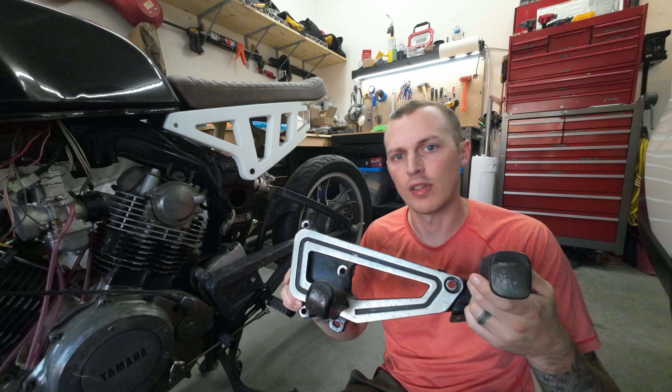I'm Derek, and in this video I'm going to show you how I created this forged carbon fiber foot peg bracket to replace this ugly cast aluminum stock piece. I hope you like this video. Stay tuned to the end to see me put it on and do some tests with it.

With the unit right from the bike, the first thing that I wanted to do was replace the foot pegs. These are really big and clunky, and actually on the other side they were ripped off and just ugly. I needed to replace them anyway.

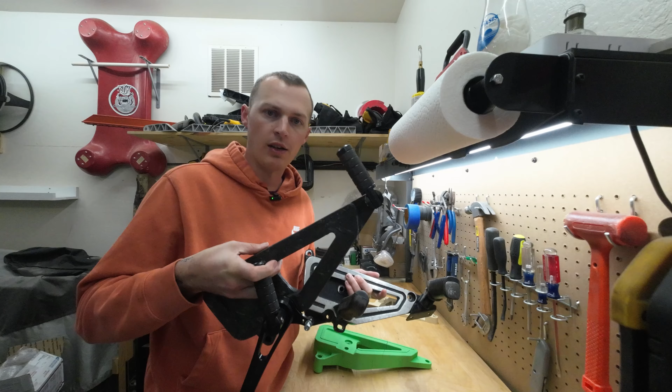So I found the Cognito Moto foot peg brackets that are folding, which I have on the new piece here, that I really like. So when I got those, I did mount them on here, and I thought that it just didn't look right. They were too modern for the look of this old piece.

Granted, I could have sanded this down, cleaned it up, and painted it or powder coated it to make it look a lot more modern, but it still just didn't match the bike.

And when I decided to do forged carbon fiber for the subframe, I thought, well, what would make it look really nice is if I did the foot peg bracket out of forged carbon fiber as well.

Originally, I was thinking of making it billet aluminum, same with the subframe, but the issue just comes down to cost and complexity. So to start off with, I had to reverse engineer the stock piece, and there's so many ways to do this, and a lot of people have different techniques for how they do this.

In this case, what worked best for me was to take the flat face of this foot peg bracket, lay it down on a large sheet of paper, trace it with a pencil, go into the holes and mark where the holes are in relation.

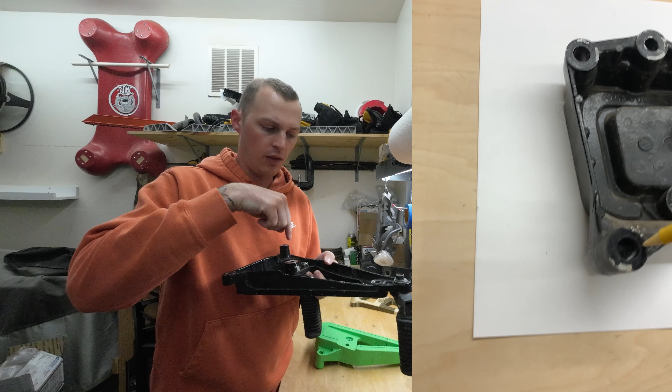And then take that sheet of paper, put a ruler on it, and put it in a scanner and scan it.

And then once it was scanned, I was able to open that up into SolidWorks, which is my preferred CAD package. And then I can scale the image based on the ruler that I put in the image, and from that, I can design the part around.

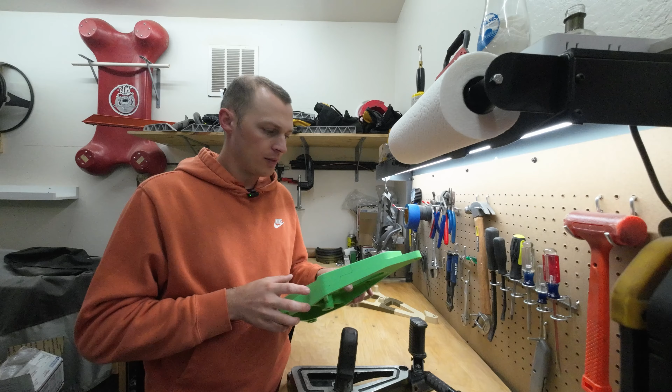So what I did is I would 3D print small little pieces that would make sure that I could get the whole pattern correct. Once I got the whole pattern correct, I replicated the part in 3D print.

I did a few things a little bit differently on the back side. This is just a cast part. You can see it does have some supporting ribs and looks a little bit different.

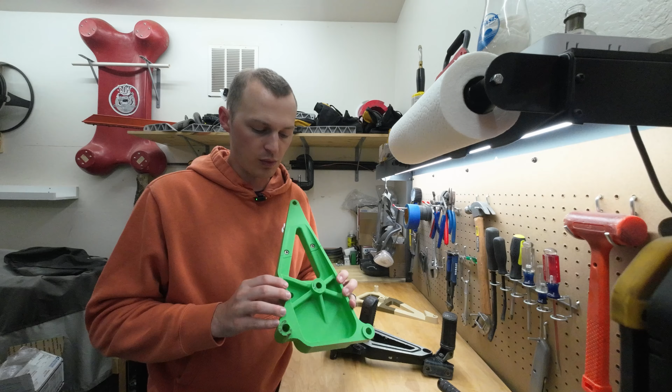To make it a little bit easier for me to do the forged carbon fiber, I made it a lot more simplified on the inside, but I kept some very strong ribs for where I knew the parts were going to mount. So from there, it just came down to making the mold.

So what I'll do is I'll take you through designing the mold, the actual cleanup process, the 3D prints, forging the parts, and then we'll touch base at the very end and we'll get it on the bike, and I'll talk you through some of the other things.

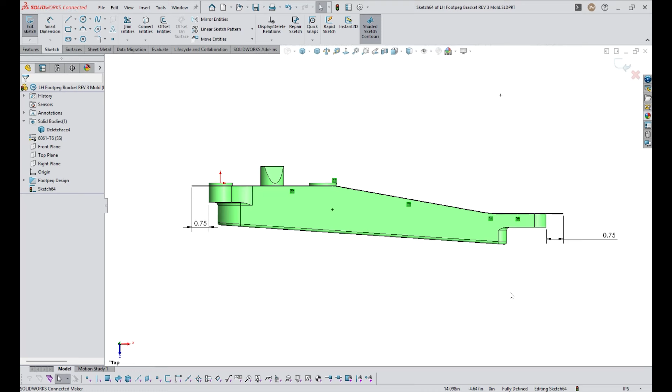Creating the mold for any sort of part for forged carbon fiber is really complex, but when you get a part that's actually quite large like this, it becomes even more complex due to some limitations, especially on my side with my 3D printer.

So I can't actually print this whole piece as one because it's too large, so I do need to split it up.

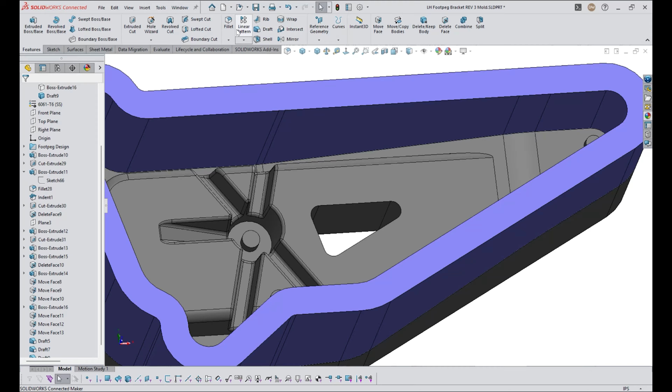But just in general, creating a mold is actually quite difficult for a number of reasons, right? You have to identify the direction that you're going to be pulling the part out. You need to make sure that you have available draft in the part so that when you do go to split it up, it can actually be pulled apart.

You have to take liberties for how you're going to actually get the components off. And in some cases, you even want to add in some ejector pins.

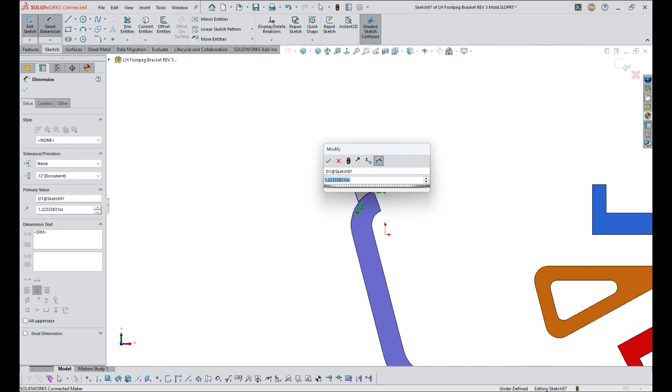In this design, I added in a lot of these flanges around the outside of the part, which actually helped it really easily split from the mold. So you want to make sure that you chamfer all of those edges and allow yourself a way to drive like a wedge in there so that you can split those up.

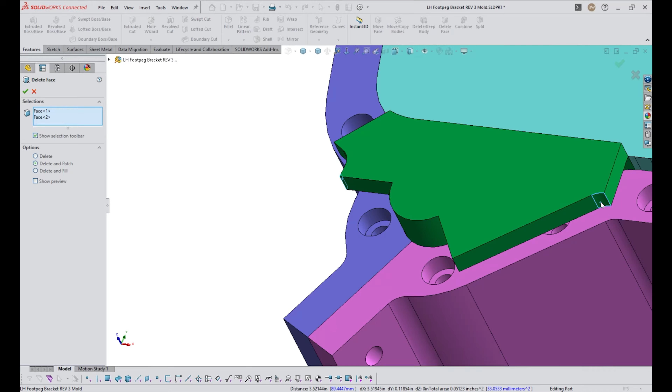In my previous design, I did it a little bit differently, and I actually found that creating these flanges on the outside was the easiest way to do it. But what you'll notice is in these sections here, these green pieces, there were some parts of the actual foot peg that sat a little bit lower than the top side.

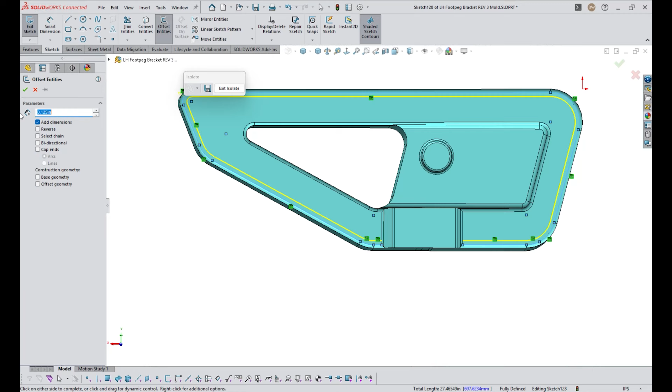So these needed to essentially be inserted before the piston starts going in. You have to take note of how much material gets put in every place. You kind of want a uniform thickness all the way throughout, and you want that top surface the piston hits to be flat, so that when you're pressing and packing it in, it's all packing consistently.

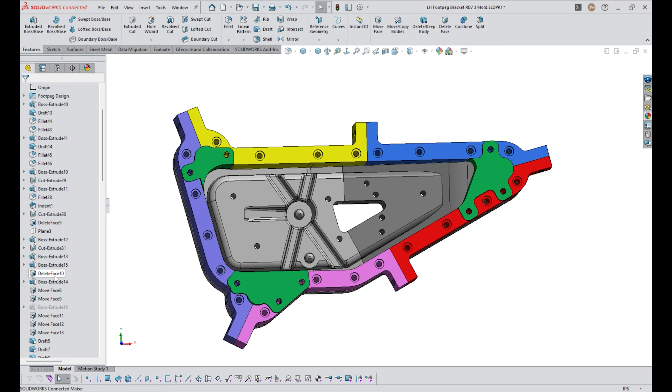But in my case, I had some parts of the actual foot peg that lived a little bit below where that top surface is. So those green pieces actually went in beforehand, before the piston went in, to drive it home, but also to hold those down in that location. When we actually go to do the forging, you'll see what I mean.

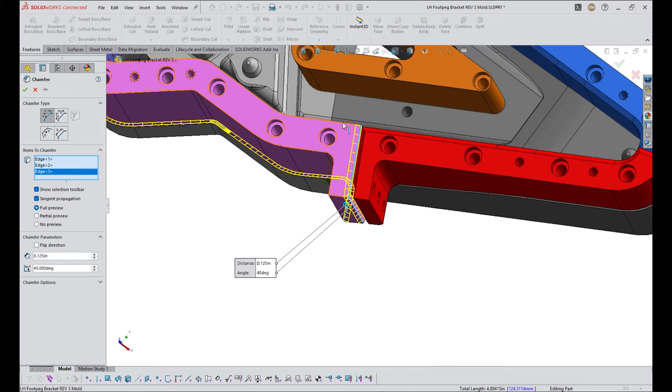But the biggest challenge here is essentially just making sure that everything can pull apart. You've got radiuses where you need them, you've got chamfers where they need to be, so putting in all the chamfers now, and then just making parts that actually bolt together.

I like to download fasteners from McMaster-Carr, the ones that I have purchased or the ones that I'm going to purchase, and make sure they fit within the model and have the correct amount of engagement in the nuts. But the one thing I learned while doing this is having all of these bolts accessible from the top side is really great when it comes to putting it together and taking it apart.

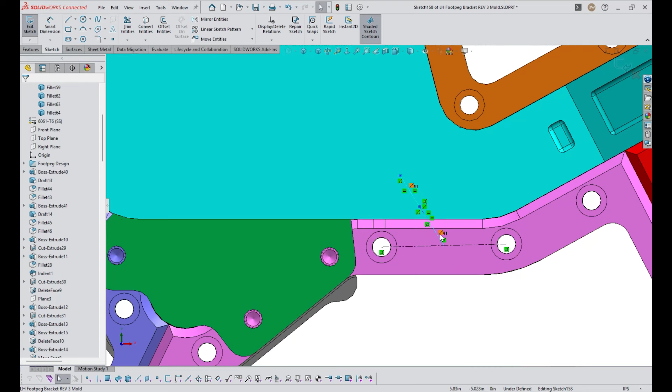But they also got filled with epoxy, and it actually made it quite a bit more complex. What you'll see is I am creating a BOM for all of my fasteners so I can go buy them.

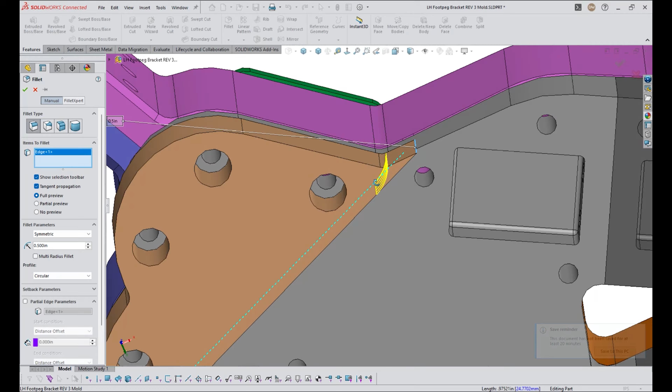In this case, right now, I'm creating essentially a base that holds it at an angle. Because this part is angled on the top side, I needed to fill up one section of it a little bit higher than the other. So I made these pieces to kind of make it level so that I knew the top side could be level.

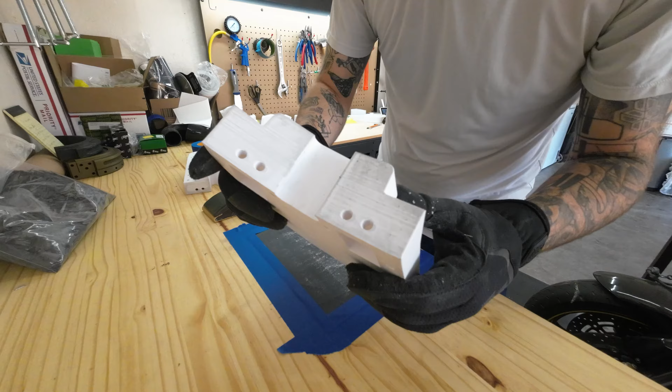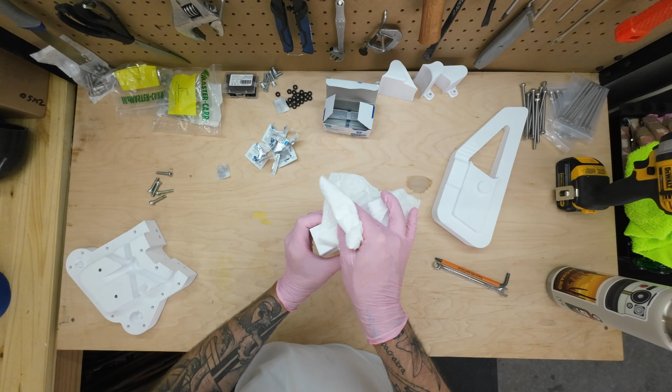Once everything was printed out of PETG, I actually used, I want to say, 5 or 6 wall loops and only 20% infill. I know other places recommend you should use like 75% infill, but I didn't necessarily go that route. 20 seemed to work fine for me. I didn't ever have any blowouts during the molding process.

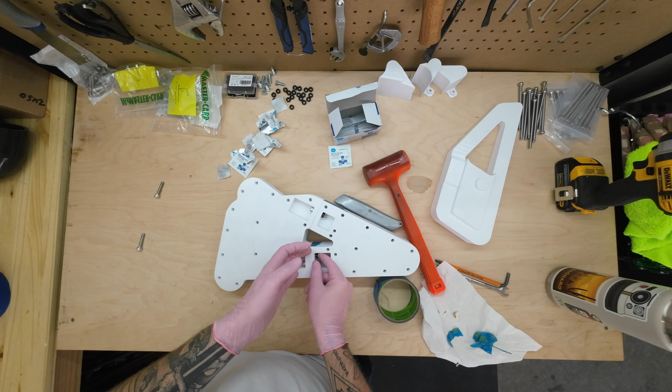But during the printing, the faces aren't necessarily perfectly flat, so you need to sand them so that you create an airtight barrier. I did, in this case, put some tape in between them, thinking it might be a good way to seal up any sort of cracks. I tried to do it everywhere, but the tape wasn't thick enough, and it ended up creating an absolute mess.

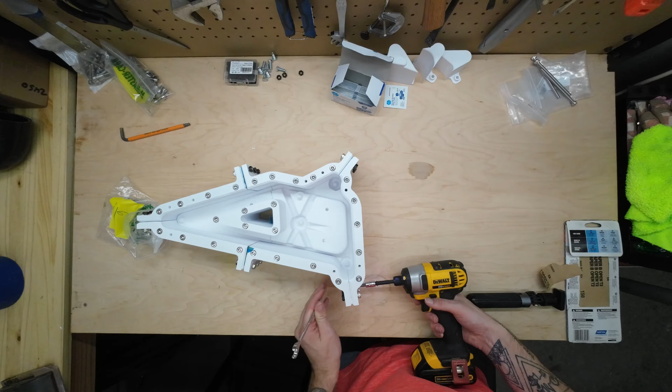But, you know, test fitting the part and making sure that you can get the piston in before you do anything is really key. So making sure all your bolts go together and everything fits appropriately is really key before you start doing anything.

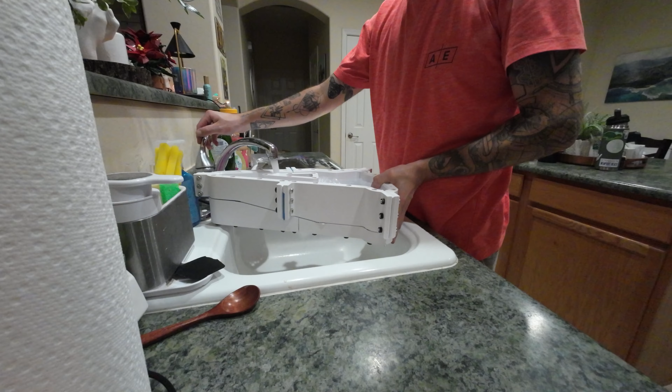And then ultimately, before you do any sort of forging, you want to make sure that it is watertight. If it's not watertight, epoxy is just going to leak out of it, and then you're basically going to ruin everything that you're planning on. In this case, you'll notice that everything was not airtight, and I've got water leaking out.

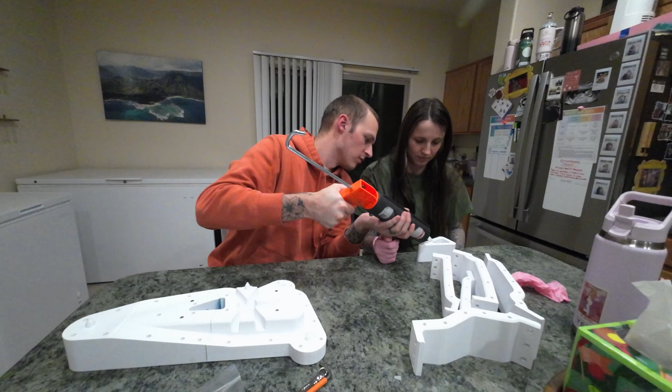So if you can't get it watertight, one way to fix that is some silicone. My wife and I sat down and put some silicone everywhere the parts would meet, and we basically siliconed the entire mold together.

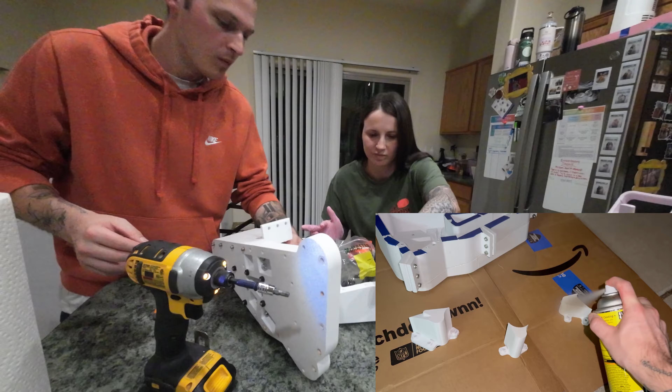Ideally, you want to spray release wax on all these parts before you put them together, but in this case, because we're putting silicone on it, you need to assemble it all with the silicone before you can do the release wax.

It does make it a little bit difficult when you're spraying the release wax on there before the molding process, just because it's harder to get into those nooks and crannies, but with the silicone in place, you definitely know you're going to get a nice watertight seal everywhere.

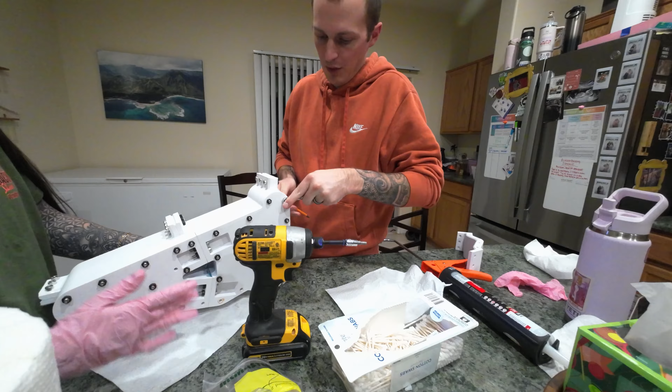So I used just clear silicone. You can find it anywhere. It had some pretty quick cure times.

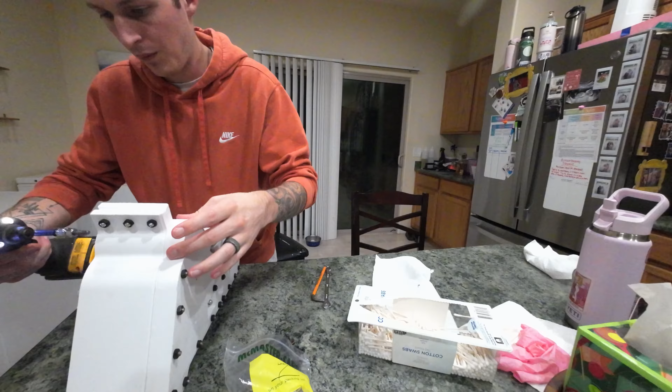Once everything was bolted together, you need to make sure that you go in there and clean up as best as possible. It's really hard to get down into that mold because some of those areas are pretty tight, so we used Q-tips and screwdrivers and whatnot to get in there and clean out those areas as much as possible. I also used some IPA wipes to clean everything up.

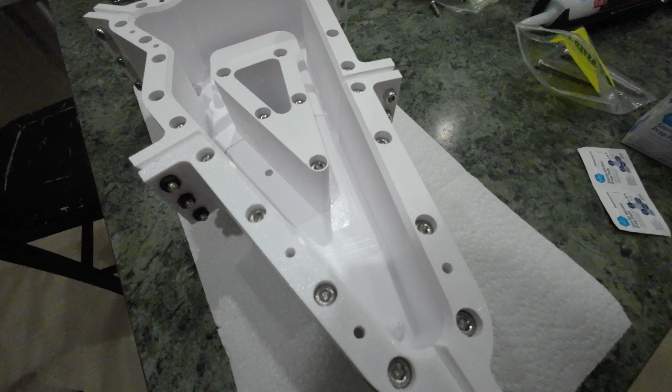So the inside looks really good from all the silicone. The outside definitely has some spill out, but I'm not too worried about that. I just want to make sure that it is nice and watertight.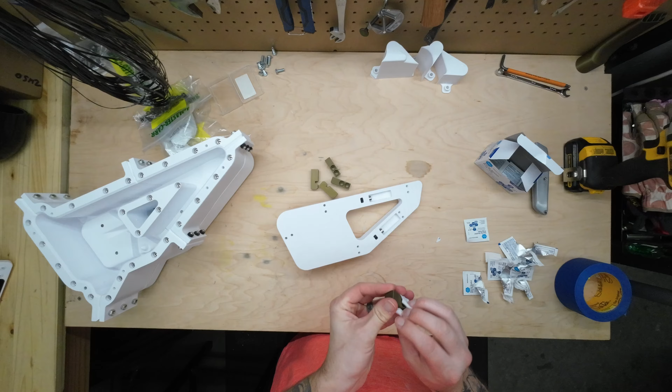So now I'm going through cleaning up. You'll notice these little blocks I put on in a past project I did. I made the top surface much higher, with a flange all the way over, so that when you press it in, you know when to stop.

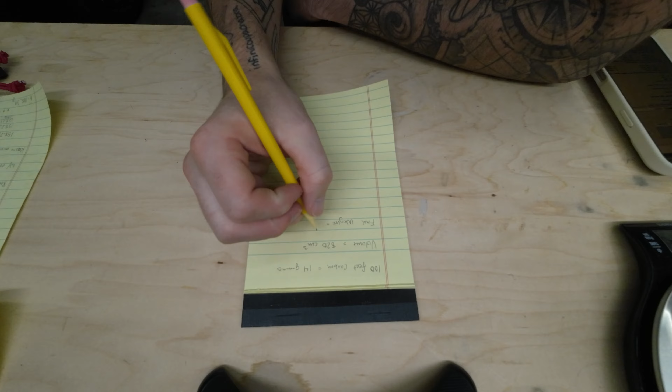But that wastes a ton of material because you essentially have to add material to that entire top side. So these little blocks allow me to know when to stop the compression without spending so much time or so much material.

So to make forged carbon fiber strong, you need long strands of it. You don't have to, but it does increase the strength. In this case, I've got a bunch of 100-foot sections that I was using to wrap up so that I can have long strands put in.

So in this project, I did 600 feet of continuous fibers or continuous strands, but they're broken up into 100-foot sections. You can kind of see them laying there, and then we will put them in.

Doing all the math to figure out exactly how many you need versus your weight, there's a little bit of math involved. You can see my previous video to see exactly what math you need to do, or check out one of the Easy Composites videos.

Packing the mold is the most challenging part. You can see we're starting to pack in some of the large continuous fibers, but essentially you want to make sure that you wet down the mold and then just start packing and wetting as you go.

It doesn't hurt to have extra epoxy, because any extra epoxy will essentially get pushed out during the forging process. When you start pushing that piston in, you'll just get all the resin come out. You just want to make sure that you are wetting down everything really well. If it's not wetted, it's obviously not going to glue itself together.

So this is the most tedious and time-consuming process. You can see I'm starting to put in some of those little corner sections. Once you've packed it in enough, you can put those in, drive them in, and then continue around.

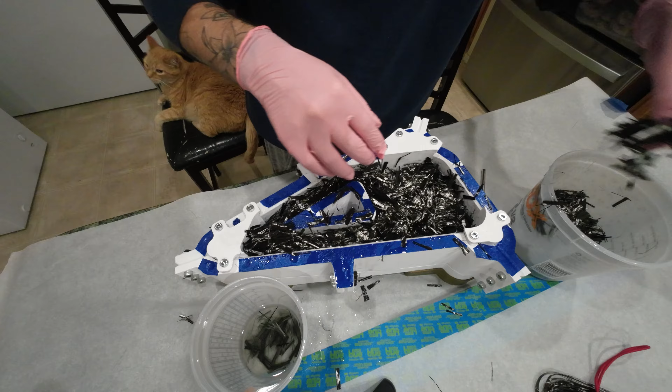It is really messy, so you'll need to make sure that you set up the area well. We like to use parchment paper because the epoxy doesn't go through it. If you just set up cardboard or paper towels, the epoxy can seep through and get on anything below. So just make sure that you have a nice clean area.

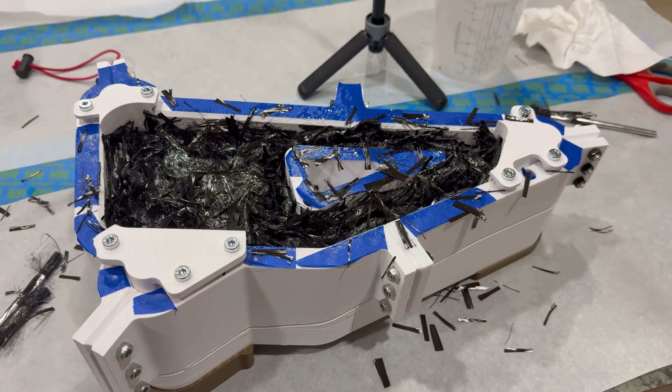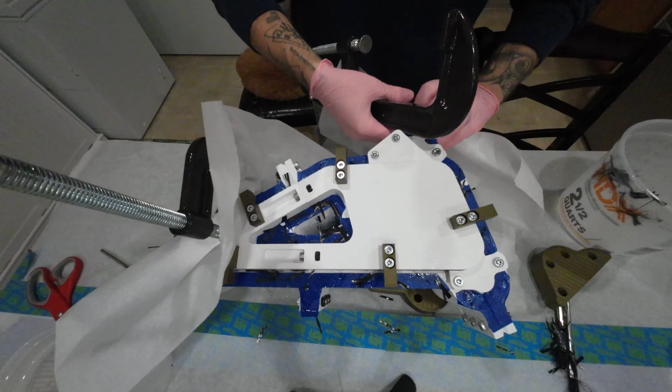You want to make sure that in your mold design you provide yourself enough room above so that you can start driving that piston home. In this case, I didn't make it quite tall enough, so it was a little difficult, but once you start getting the clamps on there, you'll start pushing them down. In hindsight, I wish I had a few more clamps, but four was good enough here.

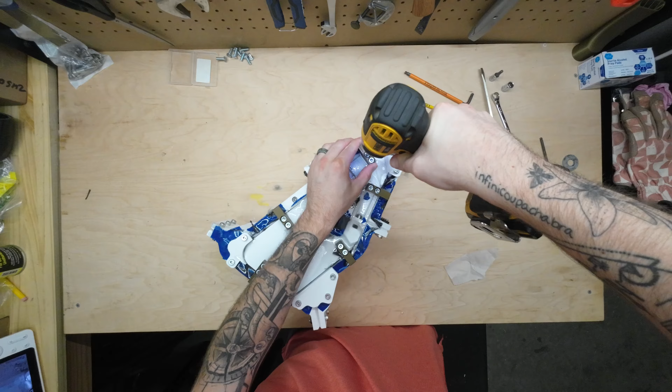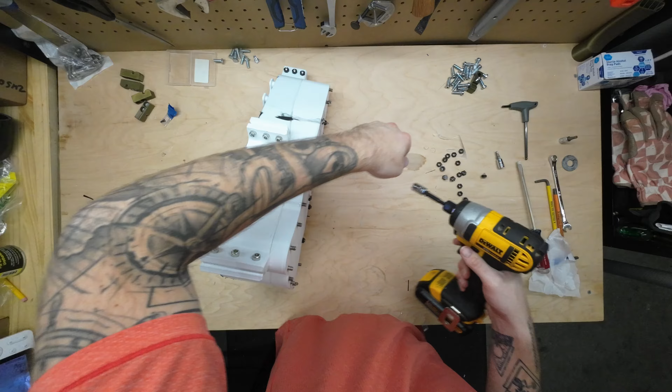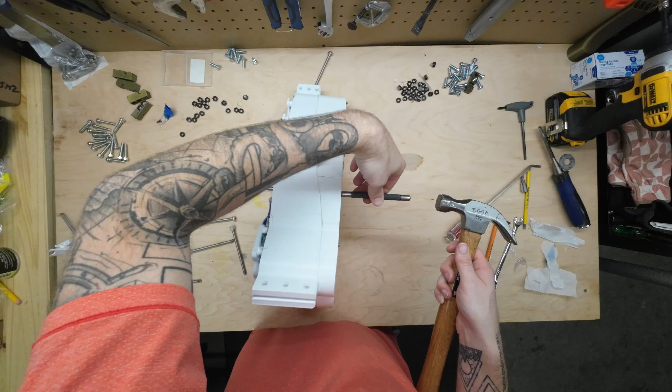One thing that ended up happening is on the bigger side of the mold, we put too much epoxy in, so I couldn't fully seat that side, and it actually has more material than I planned. But ultimately it doesn't seem to be an issue. It's something to note going forward, that I need to be very even when applying the resin and epoxy. I thought that side would need extra during compression, but it didn't.

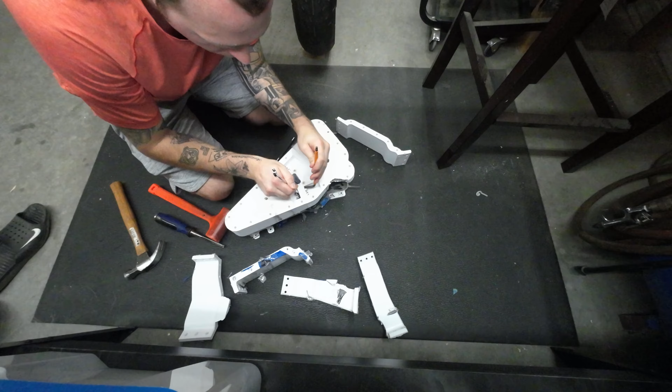You can see based on those flanges I had, it was actually pretty easy to remove those side pieces. The ejector pins I designed in were quite difficult to get out, and ultimately I ended up taking this into work and using an arbor press on those ejector pins to get them out.

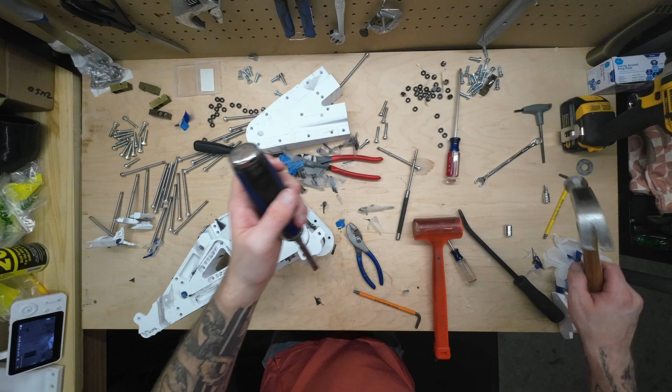When you push all that epoxy in, a bunch of the resin comes out, and essentially you create a vacuum in there. So the parts aren't just in there because they're a nice tight fit, they're literally vacuumed to one another. Some other things I did was drill some holes through the mounting locations I knew I needed, and that actually helped get it out.

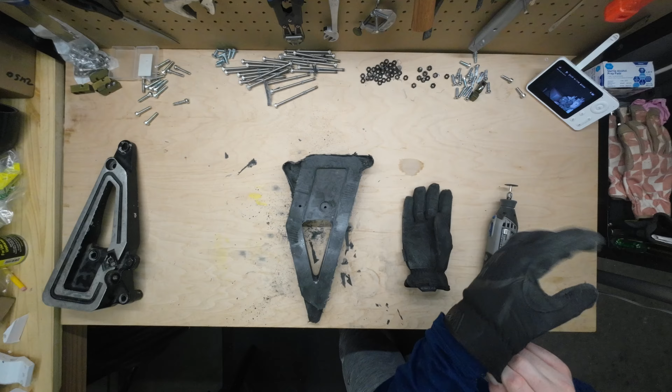But once you pull the part out, there's a ton of flashing on it, so you'll need to clean that up. If you do any sanding, make sure you're wearing a respirator — you don't want to be breathing in any of that carbon dust, it's not good for you. I like this full face mask because it covers your eyes as well. The fine particulate dust this creates is pretty crazy, so you don't want to breathe it in, and definitely don't want it in your eyes.

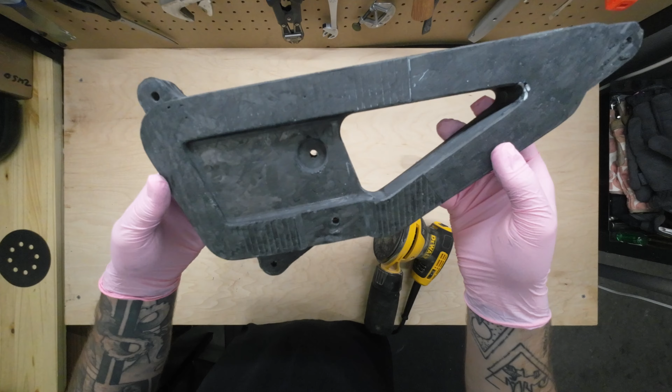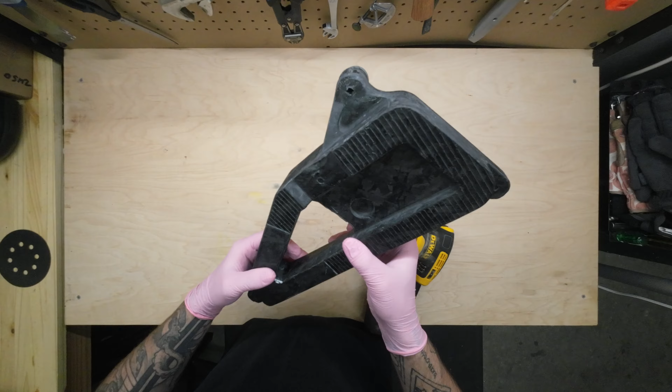When you pull it out of the mold, the finish isn't great — it looks exactly like the 3D printed part, so it takes a fair bit of cleaning up. So I cleaned up all the flashing, and you can see it still looks rough like the 3D printed part. Then I start sanding. Once it's all sanded down, you'll notice the fibers look a lot more prominent than before. At first it just looks like you're dulling the part, but you need to get that top layer off, and once you clean it up, those fibers really start to shine.

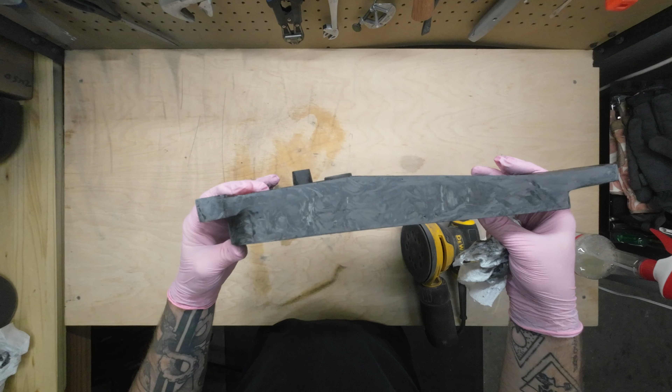I hope you really enjoyed the time lapse. There were a few things that I didn't show that I thought I would need to point out.

Taking apart the mold was actually quite difficult, and what I ended up doing is using some ejector pins. I didn't highlight that in the videos, but you'll notice in some shots of the mold there were metal dowel pins — those are technically ejector pins. I ended up putting pins in there and going to an arbor press, actually pressing the mold apart. That was the only way to get the parts apart.

So if you're designing molds like these in the future, make sure you add in some pins that you can use to press the part out. They were just dowel pins, nothing specific, and I did it on the back side so you wouldn't really see them, but they became so flush with the part that it didn't matter. Going forward I'll actually do it on the front and back side with parts to make it easier to split up.

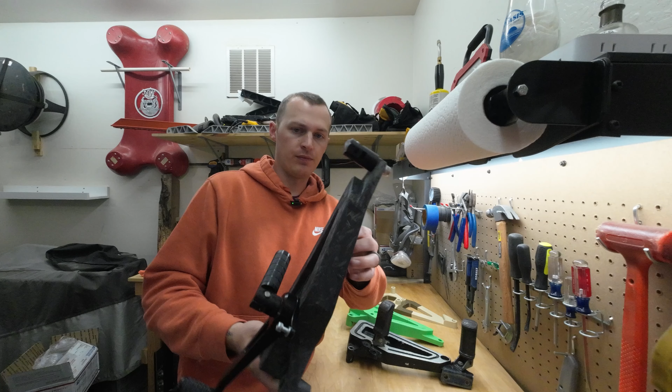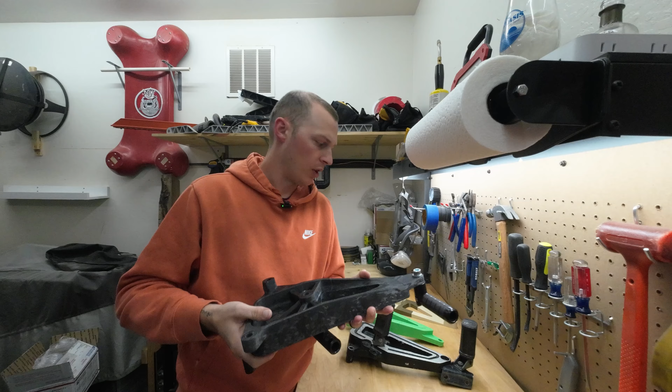The other thing I didn't show was drilling the holes for the mounting. I didn't include the holes in the mold, but there were some little tiny posts in there that gave me the hole location. From there, I needed to drill out the holes. But the holes are not perpendicular with the front face, so if I laid it down and tried to drill through, they'd always end up a little crooked. So I 3D printed a template that would hold the part level - it's a little thicker on one side than the other. I'd put the part in with the little posts on the back side, then use a drill press to go through and drill the part. That ended up working really, really well.

And surprisingly, it fits perfect on the bike. So let's go over to the bike and let's get it on there.

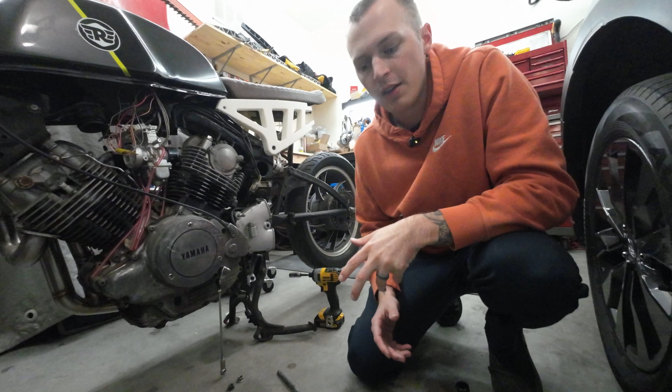When I did my initial test fit, I thought for sure this is not going to fit. I know the 3D printed one had some pretty large holes just to fit over the studs. So I thought there's no way this one is going to fit because there were some challenges with the mold - it was a little thicker on one side, didn't fit perfectly on the template. But surprisingly, it fits absolutely perfect on the bike. The holes I drilled are literally the exact size of the bolts and studs that go in. So somehow it fits perfect - but I guess, as some would say, I designed it to fit. So let's get it on the bike and take a look.

All right, so there we go. It's on the bike. It looks really awesome.

Now the next thing we need to do is test out the strength. So one thing I'll do is stand up on this back peg and make sure it doesn't break. All right, let's test the strength of this guy.

So it fully supports my weight. Now if I put all of it up on this rear peg, I'm going to try and balance as best I can. As you can see, all of my weight is on the back of this. We have no issues whatsoever - super, super strong. So I'm not worried about the strength here. Let's take a little bit more of a look.

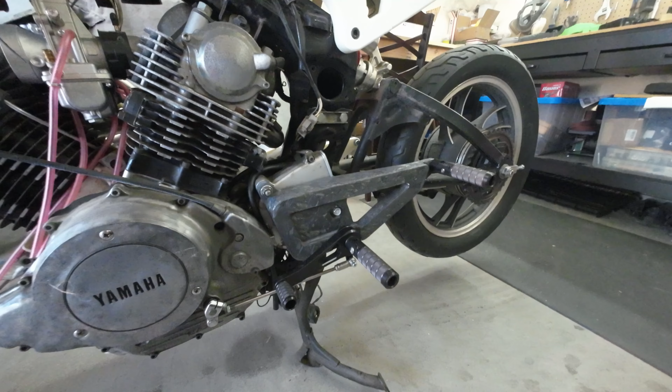So this is what the foot peg looks like on the bike. You can see it still needs to be finished up - I still need to sand some areas, and it's got some holes in here. But overall, once it gets the final layer of epoxy on, it's going to look really, really nice.

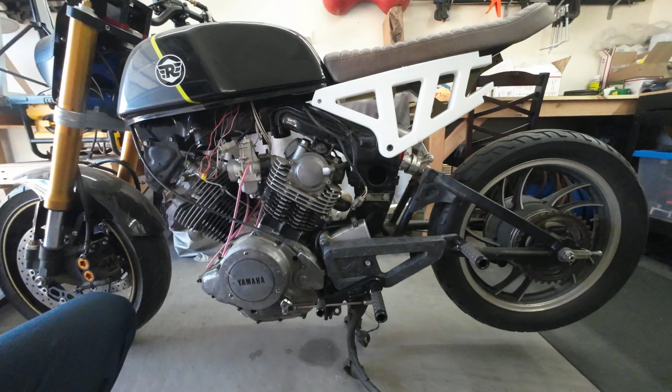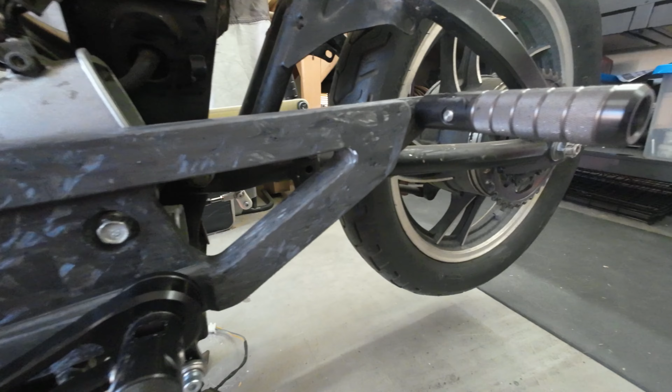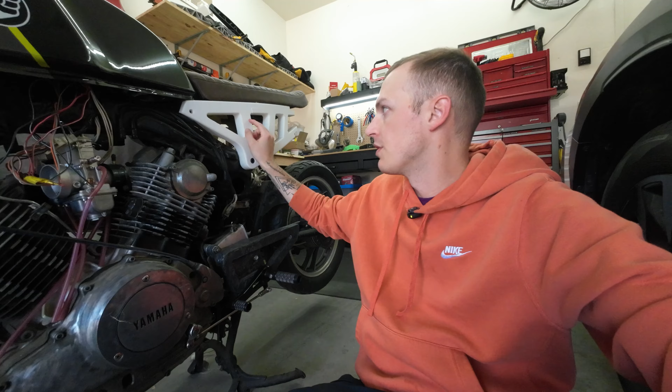So with that being said, what do you guys think of how it looks on the bike? Do you think I should have just modified or painted the stock piece, or do you think it was a really cool idea to do this forged carbon fiber? I'd really love to hear what you guys think. Now this look that you're seeing here is going to be the same on the subframe. What you're seeing here isn't the actual design, but do you think it's going to look really cool? I'm super excited to try it.

I'm going to do the other side next before I tackle the subframe, because this whole piece essentially is going to be one forged carbon fiber piece, so it's going to be really difficult and take a lot of time. So I'm going to try and learn as much as I can on the other side before tackling the subframe. But what do you think? Do you like it?